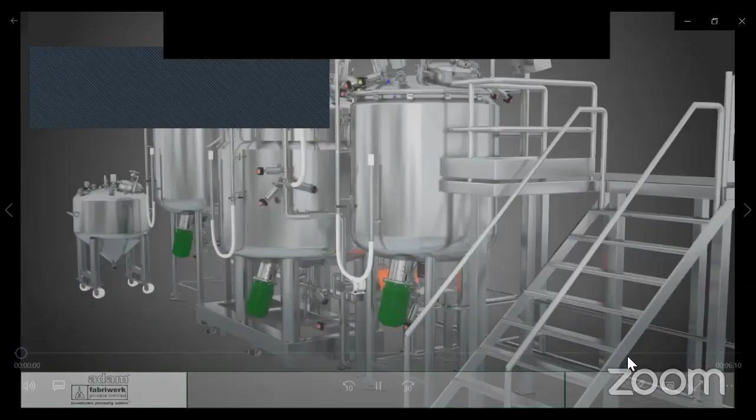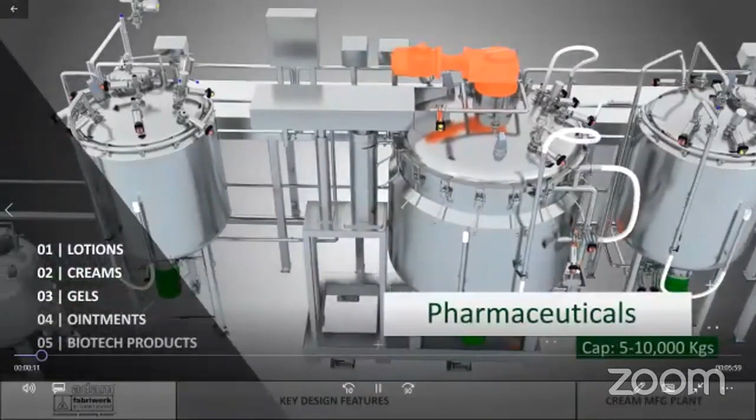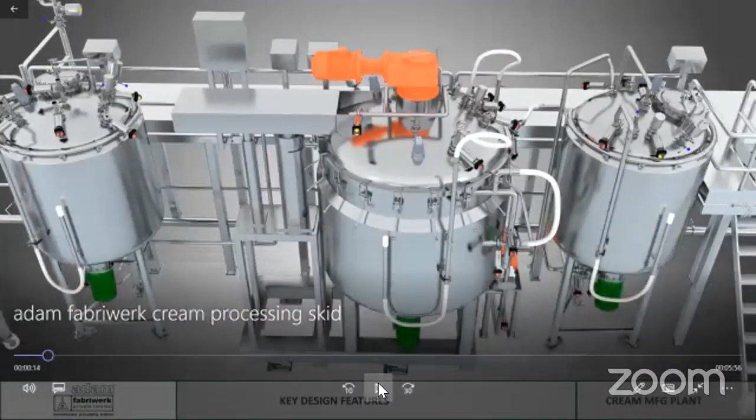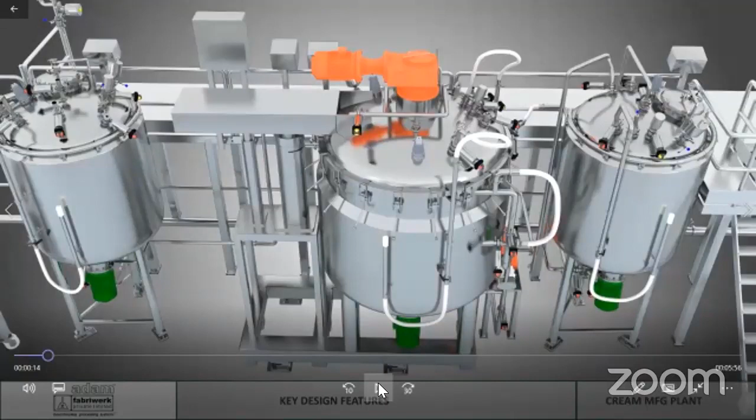What you see here is a typical cream and ointment plant for capacities ranging up to 10,000 kilos or 10 tons. The center one is a vessel, and the two vessels on the sides are the phase vessels, typically the wax and the water. In many markets, there is only one slurry vessel used, but most of the time in India and a few other markets, we have seen usage of a separate water and a separate oil or wax vessel. These are used independently. In some formulations, they are combined in a slurry form and only one phase vessel is used.

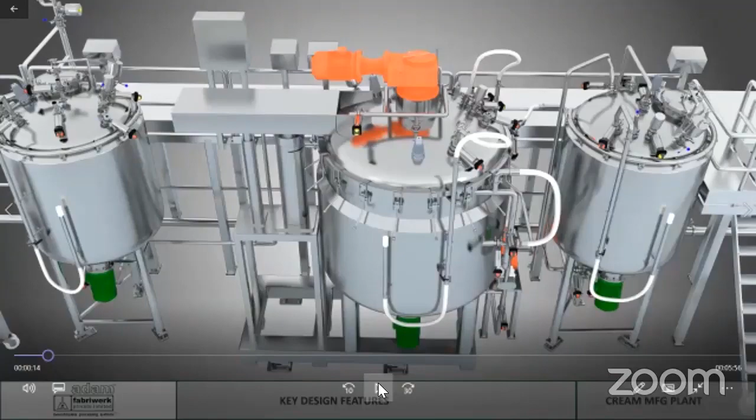The applications for the process skid are used in pharmaceuticals as well as cosmetics. So it could be cold creams, emulsions, lotions, gels, shampoo, creams, and ointments. It can also be manufactured for toothpaste.

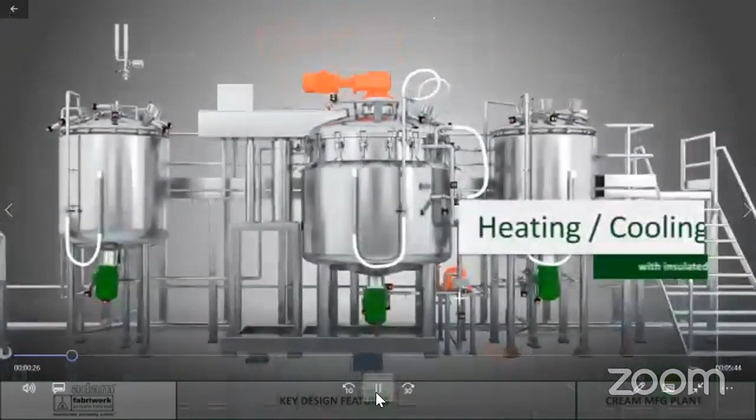Within the system, there is for each vessel an option for heating and cooling with insulation. There is temperature control with safety features built into the system so that for critical products, temperature does not overshoot the set points within the system.

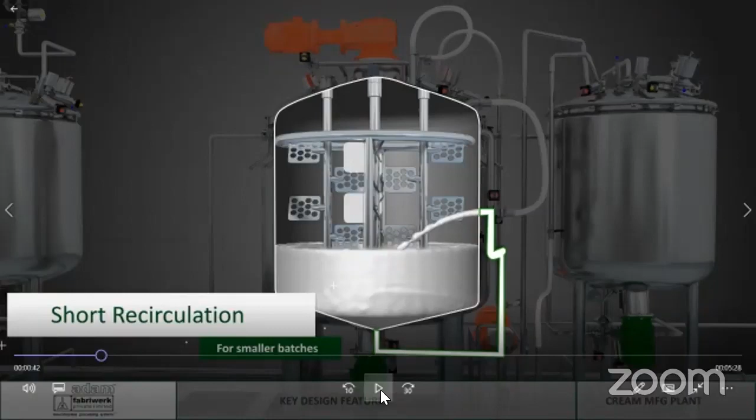The special feature that you see here is a short recirculation path for smaller batches. This is very important for processing smaller than half the volume of the batch size of the vessel. So if the vessel capacity is 1000 kilos, and let's say you have to process 400 kilos, then this short recirculation loop takes care of the shorter recirculation. This ensures the product comes through the path directly into the vessel without jarring or any damage during the heating cycle.

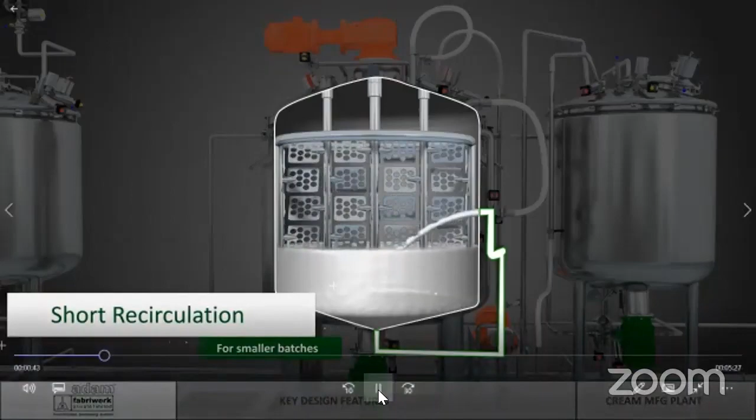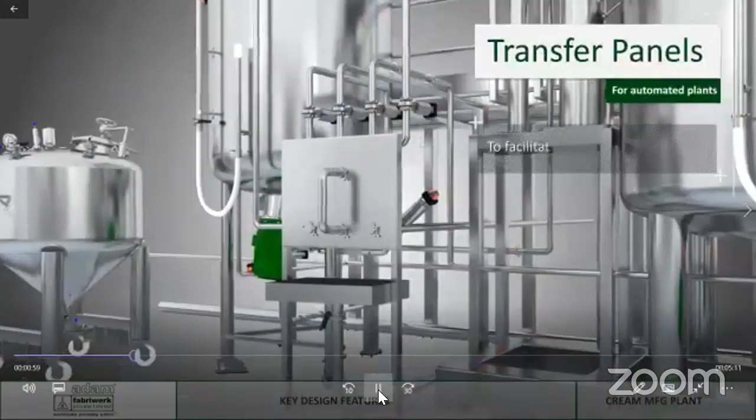There is hydraulic lifting for the top dish of the vessel to take the top lid up. There are transfer panels also to facilitate CIP of individual vessels.

A transfer panel is a system in which lines are connected from the CIP skid and redistributed to different points within the vessel. So the spray ball of each vessel of the manufacturing, wax, water, as well as the storage vessel is connected through the transfer panel, and it is a fail-safe mechanism for cleaning in place of the process vessels. It ensures that at any point of time you can carry out batch operation within the vessel and carry out CIP of the other vessel at the same time.

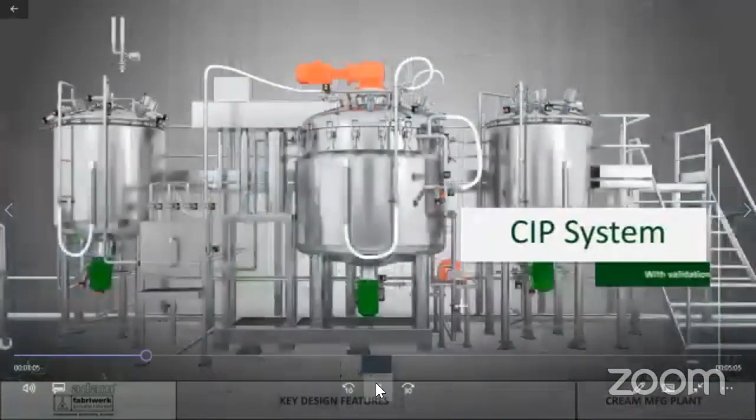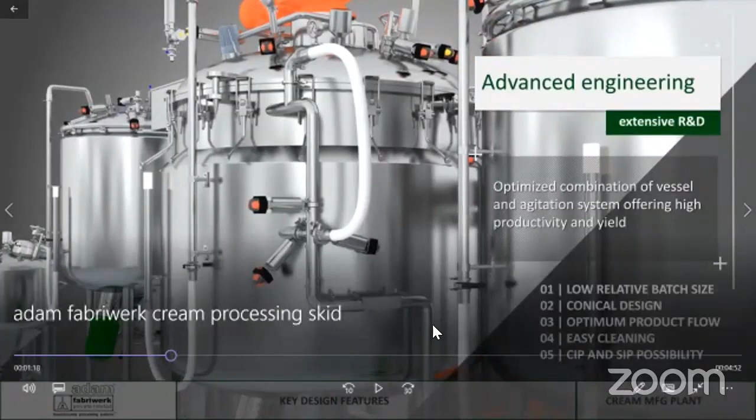CIP also is a part of the system. The conical design of the bottom of the manufacturing vessel ensures lower batch sizes are possible within the manufacturing vessel. It's also ease of cleaning, and it ensures a high degree of CIP ability and SIP ability for specific operations.

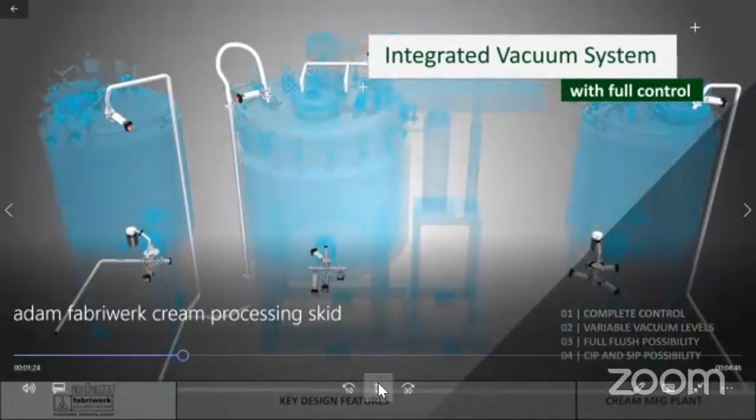All three vessels, the wax vessel, the water vessel, and the manufacturing vessel, are completely built with vacuum, and they are provided with an integrated vacuum system which gives variable vacuum levels, a full flush possibility within the vessel, and ensures that all raw materials within the system are sucked by vacuum, with no need for specific pumps for sucking in raw material.

The touchscreen HMI is easy to use, large, and the user interface is operator friendly. These are, of course, provided with SCADA options with supervisory control and data acquisition. They are also customized for specific levels of software, and the configurations are made flexible and highly customized for particular operations to suit critical products.

The high shear head within the vessel also has a fan and screen arrangement system. It is vertically or side mounted, which generates shear and drives the product flow, also discharges the batch specifically when it is in the bottom configuration.

This is fitted with a variable speed drive which ensures variable shear force on the products manufactured. It also ensures complete de-agglomeration of the product, through which the product de-agglomeration is done, and the anchor with the scrapers gives a complete mix within the manufacturing vessel.

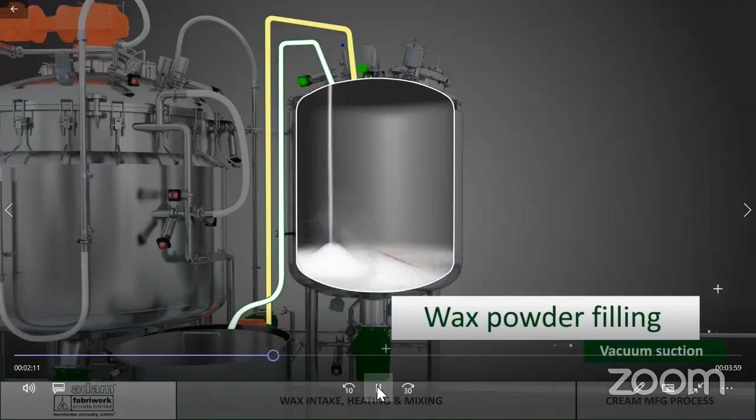Typically, while starting a batch, carbomers or powders or waxes are sucked into the vessel or inserted through the manhole. These are powders which are sucked in under vacuum and then melted. The advantage in this operation is that there is no use of drums or anything else for opening through the manhole. They are melted at a temperature of 75 to 80 degrees.

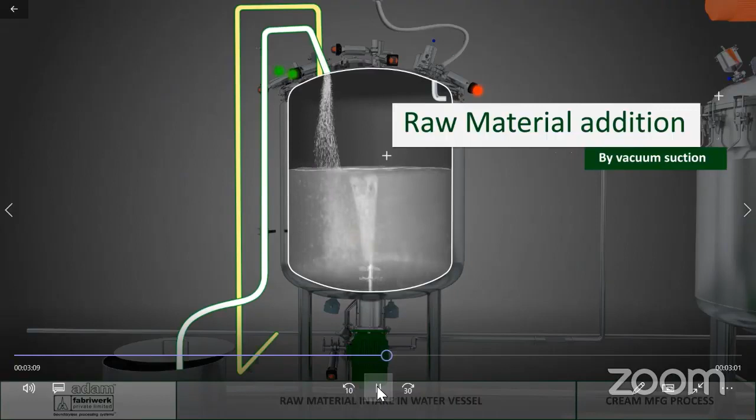The water phase vessel also works on the same principle. Water is taken into the vessel and then specific carbomers are added and dissolved into the water through a bottom sawtooth cutter, a propeller, or a high shear mixer, as the case may be. All mixer configurations are customized for specific operations. Again, the advantage of transfer by vacuum cannot be replaced by any other mechanism.

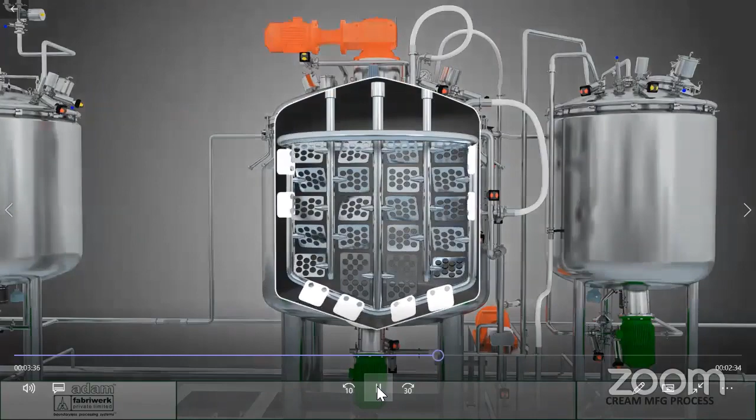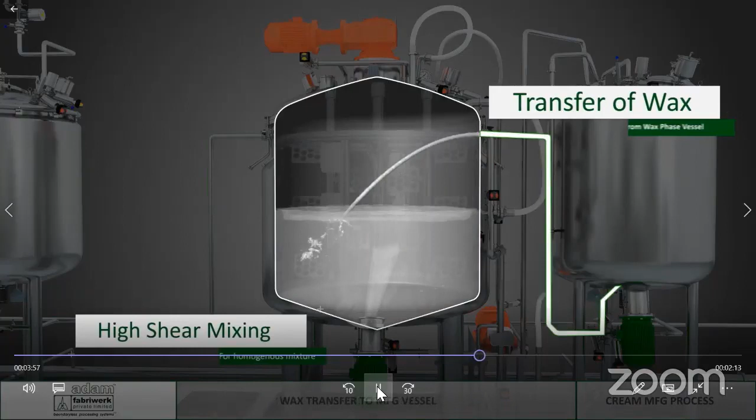Once the wax and the water are both ready, they are sucked into the manufacturing vessel by vacuum. There is no pump required for transfer from water to manufacturing or wax to manufacturing. While these two transfers take place and the entire product comes into the manufacturing vessel, it is moved across by the anchor within the vessel.

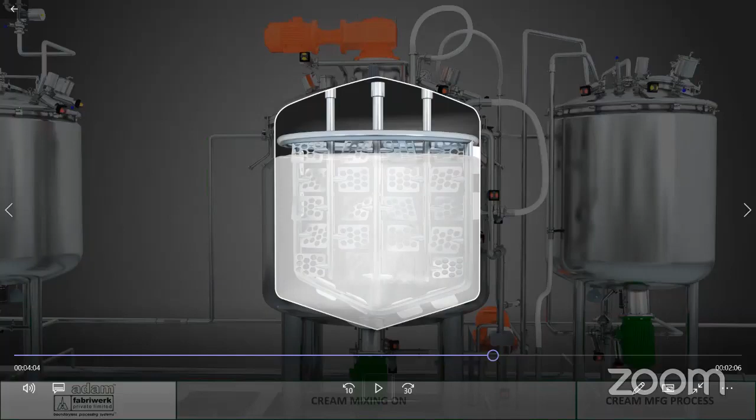The anchor you see here is a semi-contra rotary design with floating scrapers on the sides, which are adjustable as per the load pushed onto the scrapers. The semi-contra rotary agitation system also has a huge advantage of mixing products at a much faster speed than other agitation systems. In case of very high viscosity products, like 300,000 or 500,000 centipoise, we also offer agitation options of contra rotary for these applications.

The wax and water is moving in now at 75 degrees and now being cooled. It also goes through an internal circulation where temperature is reduced from 75 to 35, or process temperature as per the batch. This is where the emulsion is formed by combining the wax and water. The drug is added - the API, color, or perfume, as the case may be - added from the top.

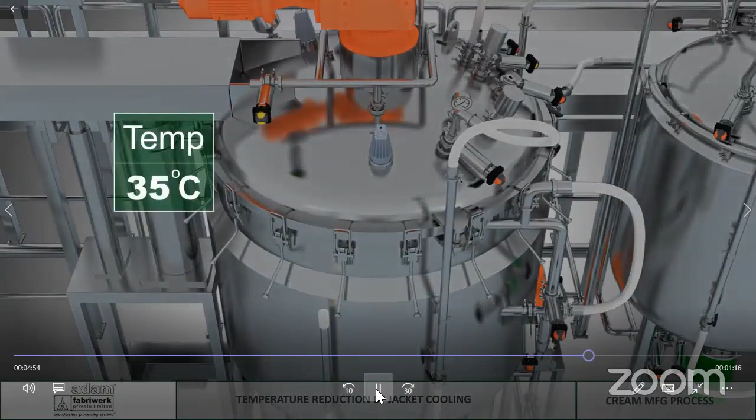Once the product is cooled down, you can see the anchor moving very slowly to ensure mass movement is carried out, and this moves the product within the vessel and scrapes it from the walls. It is very important to note that the high shear is not operated once emulsion formation is done. Over-operation of the high shear may lead to low viscosity or damage the product or the system.

Once the product is manufactured, cooled down, and the API or drug is added and mixed, the product is ready to be transferred to the storage vessel.

You see here a mobile storage vessel into which the product is transferred, and this transfer takes place through a twin lobe pump, which is a sanitary clean-in-place design, and this transfers the product from the outlet of the manufacturing vessel to the storage vessel. It is also a completely hermetically sealed process vessel which has spray balls for cleaning within the system, ensuring complete CIP-ability.

This was a system courtesy of Encube Ethicals, where we have many of our manufacturing systems in operation.

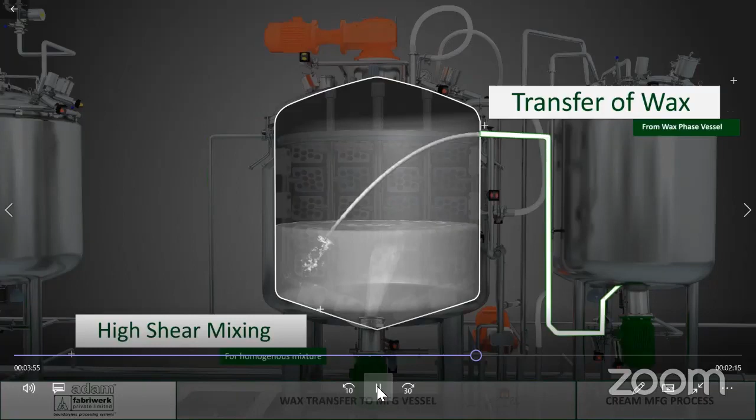It is important that the design of the system reduces the processing time of the emulsion to a large extent. It also helps ensure that the product is manufactured under a safe zone. There are different options and L/D ratios to which the manufacturing system can be designed, keeping in view existing layouts and existing conditions.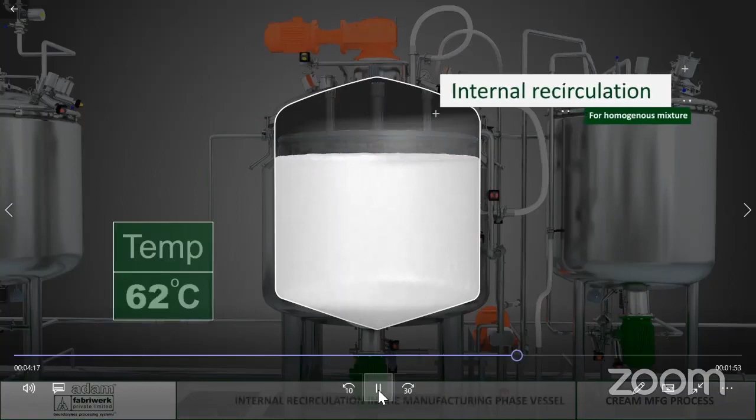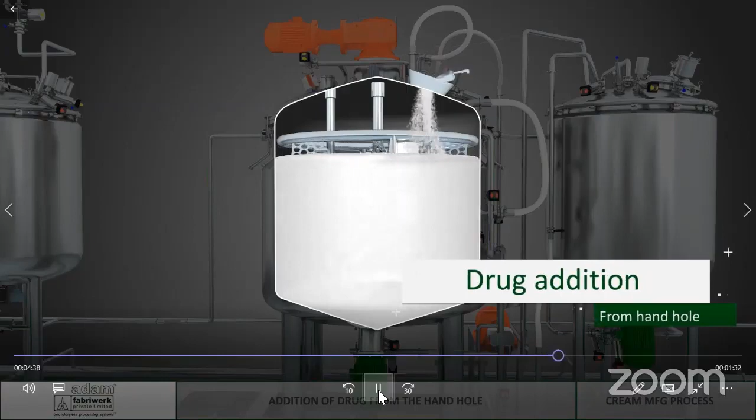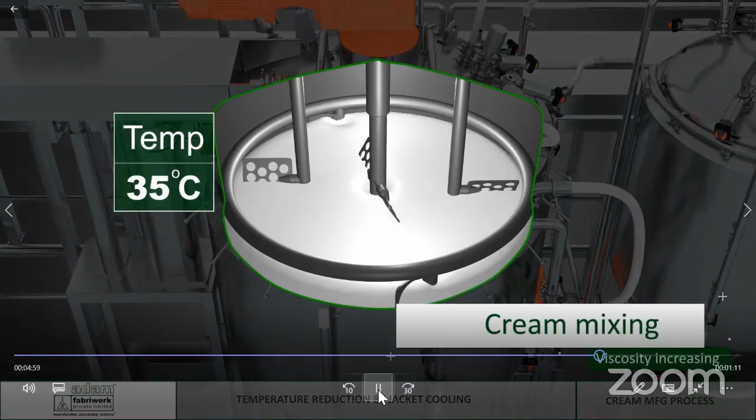The complete system moves through a series of automation cycles of modular operations - vacuumizing, mixing, checking the weight, and then the high shear as well as the transfer - to ensure that the product made is compliant to the recipe cycles that have been designed by the R&D team and the pilot operations which have been carried out.

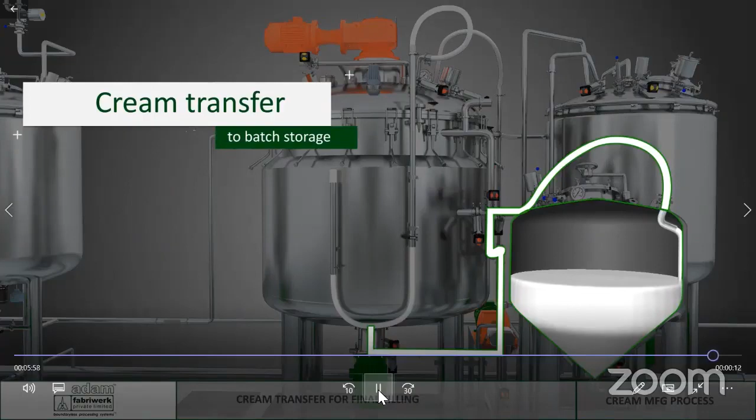The same scale can be scaled down from a larger batch size to a lower batch size of 50 kilos, and can be manufactured in an R&D batch size of 5 kilos. And this can be scaled up all the way to 1,000 kilos or 10,000 kilos, essentially keeping the geometry and the tip speed with the shear rates of the agitation system as a constant.

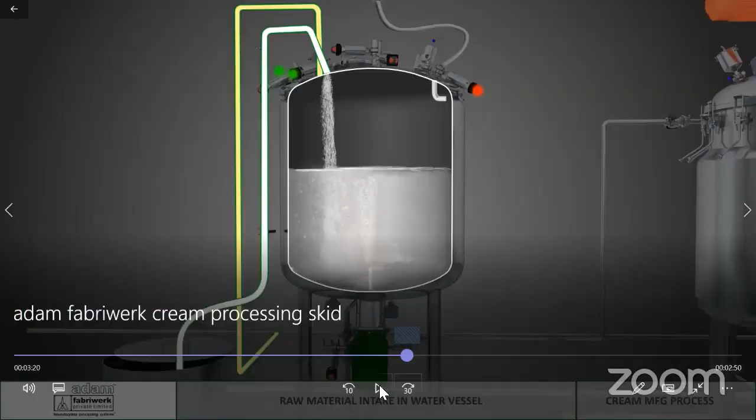Well, here we are. Any questions? Thank you for the session. No questions. There are no questions from the viewer. Okay, great.